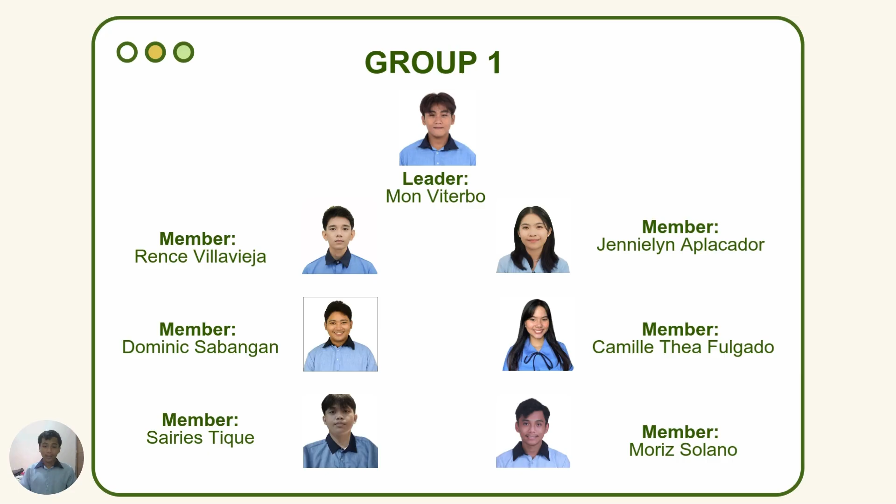So, as I said before, we are Group 1. Here are our members: our handsome leader, Mon Viterbo, and we have six other members, Rence Villavieja, Dominic Sabangan, Sairies Tique, Jennielyn Aplacador, Camille Thea Fulgado, and me, Moriz Solano. Very well then. Let's go to the next topic.

The evolution of AutoCAD. So the evolution of AutoCAD can mainly be split into four periods, let's say, from 1982 to 1992, 1999 to 2007, and then 2010 to 2017, and 2020 to 2023, and of course the present day. So let's go to the first period. The first period was, let's just call it the period of accessibility, since it was mainly focused on that.

AutoCAD was launched in 1982, specifically December 1982, as one of the first CAD, computer-aided design, programs for personal computers, revolutionizing the design process. Before its introduction, CAD tools were expensive and limited to specialized hardware, but AutoCAD advanced the field by running on widely available PCs. Before AutoCAD, if you wanted to use CAD programs, you had to use very high power and very specialized hardware, like old computers such as the IBM and the ENIAC.

But AutoCAD was the first one that was mainly available in common PCs, like the one that you are using today, except they were less updated, of course. This period also saw the introduction of AutoLISP, a programming language that automates design tasks in AutoCAD. Similar to how we designed programs in C++ in the previous semester, AutoCAD uses AutoLISP, a dialect of Lisp that is specifically for AutoCAD. AutoLISP also extended and customized AutoCAD product functionality, and by 1992, 3D designs were added, allowing for more capable projects.

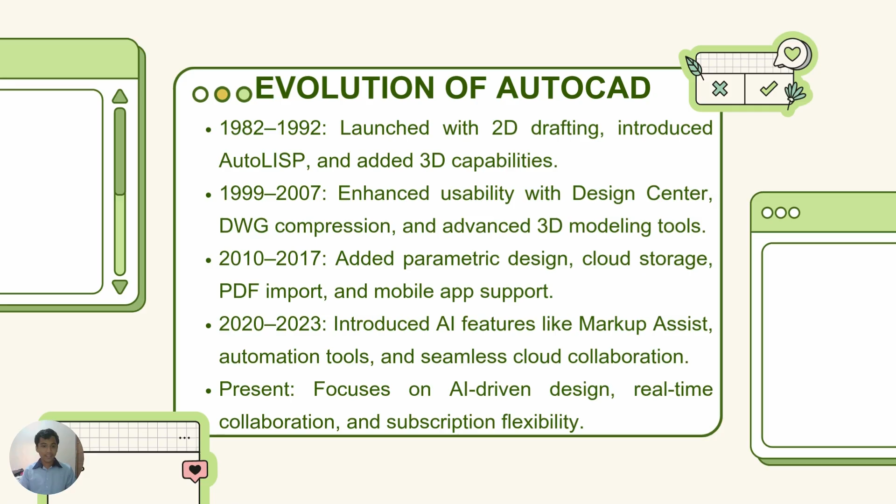Okay. Overall, AutoCAD has had many different versions, around 25 or more. And if I counted all of them, there would be even more. So I'll summarize all this just for you. I hope you enjoyed. Okay, let's move on to the next reporter on the next topic.

Impact of AutoCAD on mechanical engineering and architecture. Okay, so this is the impact of AutoCAD on mechanical engineering and architecture. For mechanical engineering, we have precision and accuracy. With AutoCAD, you can create detailed 2D or 3D models for precise component designs. Next is rapid prototyping. AutoCAD facilitates simulations and testing before production.

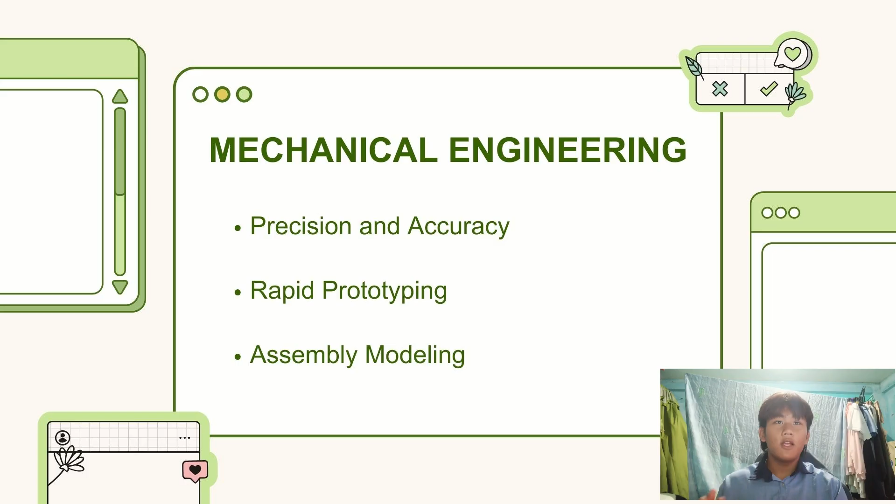And lastly, assembly modeling. AutoCAD can visualize relationships between parts in complex systems. A good example of this is that AutoCAD is used in the automotive industry to design engine components and optimize performance. While in the field of architecture, we have blueprint creation. It streamlines the creation of accurate architectural drawings. Next is 3D visualization. AutoCAD helps visualize buildings in realistic 3D for better client presentations.

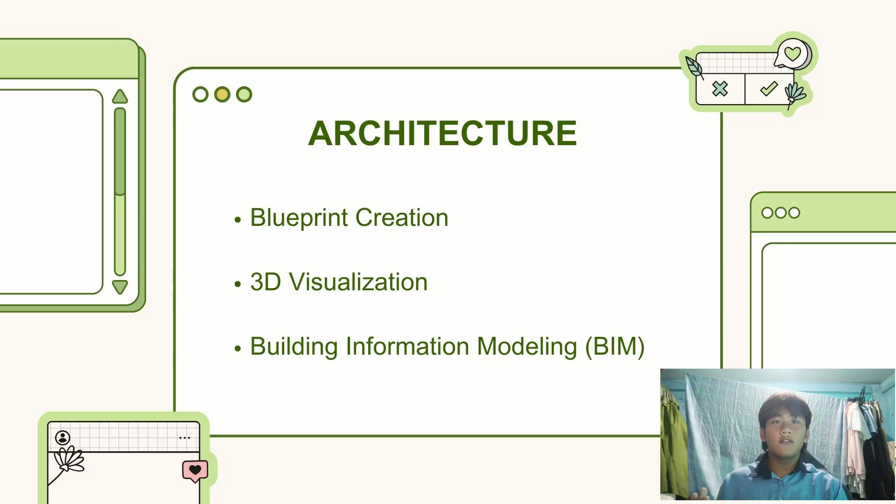Lastly, Building Information Modeling, also known as BIM. AutoCAD optimizes designs for functionality and energy efficiency. A good example of this is that architects use AutoCAD for designing floor plans and 3D building models. Next, let us proceed to AutoCAD in modern collaborative design projects. First, we have cloud integration. It enables real-time sharing and collaboration from different locations.

Next is version control. It tracks changes and ensures the team works on the latest version. Next is collaborative tools. It allows comments, markups, and feedback to streamline communication. And lastly, we have integration with other software. It facilitates seamless teamwork across different design disciplines. For example, in large-scale projects like bridges or skyscrapers, AutoCAD has various teams collaborate on structural, mechanical, and architectural aspects.

So now, let's tackle and analyze kung ano nga ba ang advantages and disadvantages of using AutoCAD in comparison to other CAD software available in the market. So let's dive in the pros of using AutoCAD. Number 1, extensive functionality and versatility for 2D and 3D design. AutoCAD is very versatile because it offers both 2D drafting and 3D modeling features. This means that whether you are creating simple floor plans or more complex 3D structures, AutoCAD has the right tools to do the job.

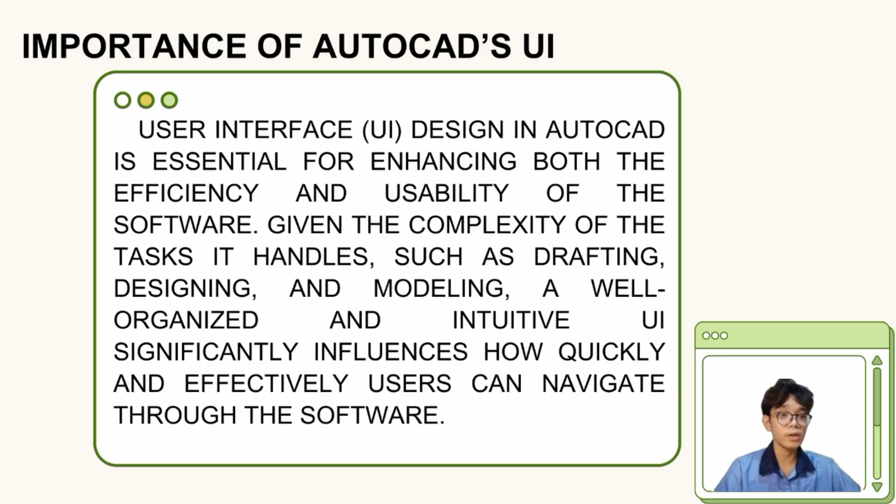So as for the evolution of AutoCAD, in the 1980s to 1990s, in its earlier versions, AutoCAD primarily relied on the command line for user input, meaning users had to type specific commands to perform tasks. This approach demanded a significant amount of memorization, as users needed to remember the exact commands and their syntax. While this method was highly efficient for experienced users who were familiar with the commands, it posed challenges for beginners as it was not user-friendly or intuitive, making the learning curve much steeper.

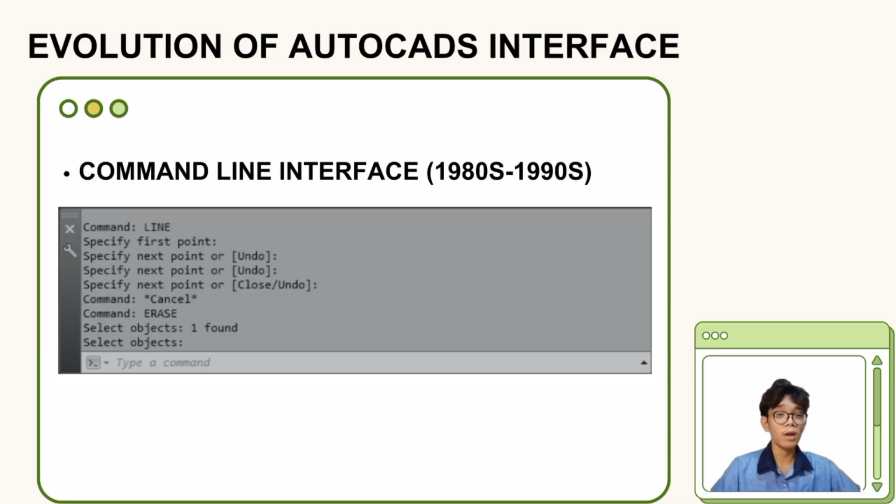So as for the example, the image is shown below. And because of that, in the 1990s, AutoCAD's user interface underwent significant improvements with the introduction of menus and toolbars. This evolution aimed to make the software more accessible and user-friendly. Instead of relying solely on typed commands like the first one, users could now perform tasks with a single click, thanks to the drop-down menu system and toolbar icons.

These visual elements were designed to be more recognizable and intuitive, reducing the need for extensive memorization. For instance, a user could quickly identify and select drawing tools, editing options, or settings directly from the menus or toolbars, streamlining the workflow and enhancing the overall user experience.

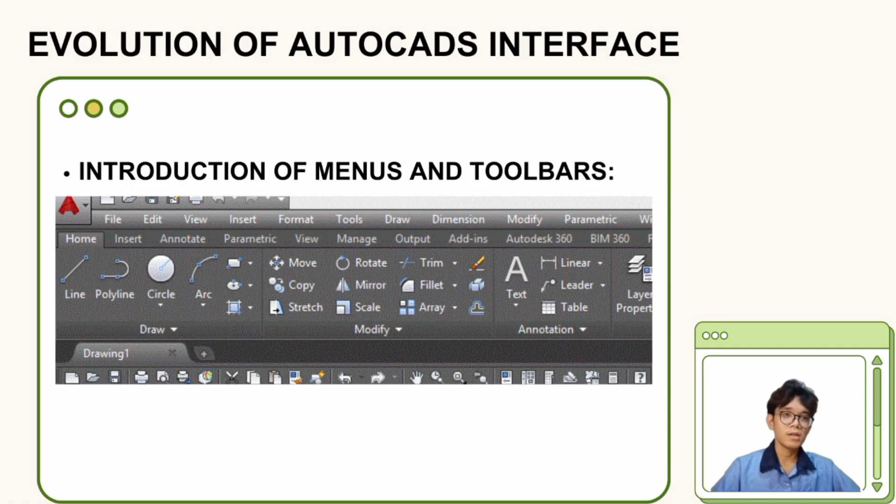In 2000, the graphical user interface was expanded, so it grew more powerful. The software adopted a more sophisticated graphical user interface, integrating more tools while enhancing visual appeal. This was part of a larger trend of software becoming more user-friendly and less reliant on text-based commands.

And in 2009, the ribbon interface was introduced. This major shift occurred with the introduction of the ribbon interface in AutoCAD in 2009. Borrowing from the Microsoft Office suite, the ribbon replaced traditional menus and toolbars with groups of related tools. This change aimed to make AutoCAD's functionality more discoverable and organized by user workflow. Though controversial at first, it ultimately became a standard for AutoCAD's interface.

Next is the 2010s era. In this, customization features were introduced: more robust customization options such as customizable workspaces and menus, where users could create specific environments suited to their projects. These features allowed for a personalized experience, giving professionals the ability to streamline their workflow.

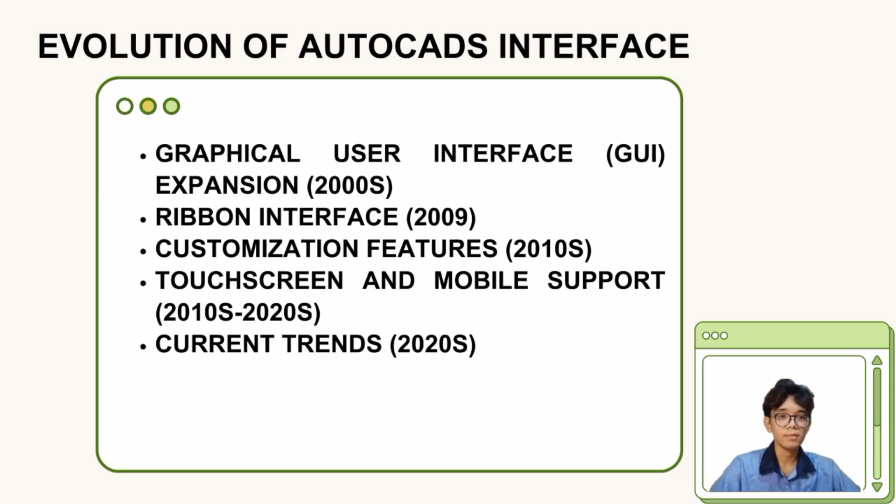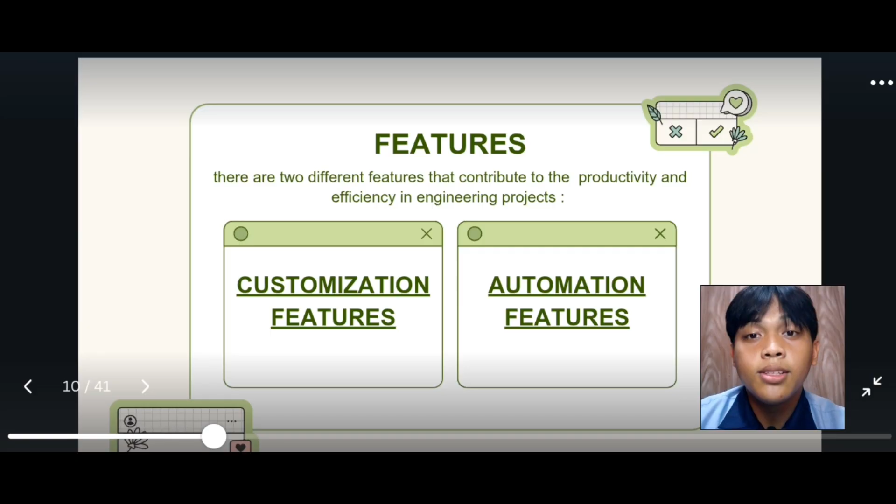How do the customization and automation features in AutoCAD contribute to productivity and efficiency in engineering projects? To answer this question, I will categorize it into two features: the customizing feature and the automation feature. In terms of the customizing feature, the first bullet talks about customizing AutoCAD drawing templates. This feature improves design efficiency by storing settings like units, scales, layers, and styles.

These templates reduce repetitive setup, which enables an easier workflow. For example, architectural templates with predefined layers for walls and furniture. This allows designers to focus only on the work, not the setup itself, as setup creates inconvenience and is time consuming. Creating templates to fulfill needs promotes consistency, reduces errors, and enhances productivity across various design fields.

In the customization features, this feature not only protects the integrity of the templates, but also encourages greater efficiency. It allows users to focus on the creative aspects of designs without repeatedly managing the basic settings. Overall, drawing templates serve as a critical component in enhancing productivity and maintaining uniformity in AutoCAD projects.

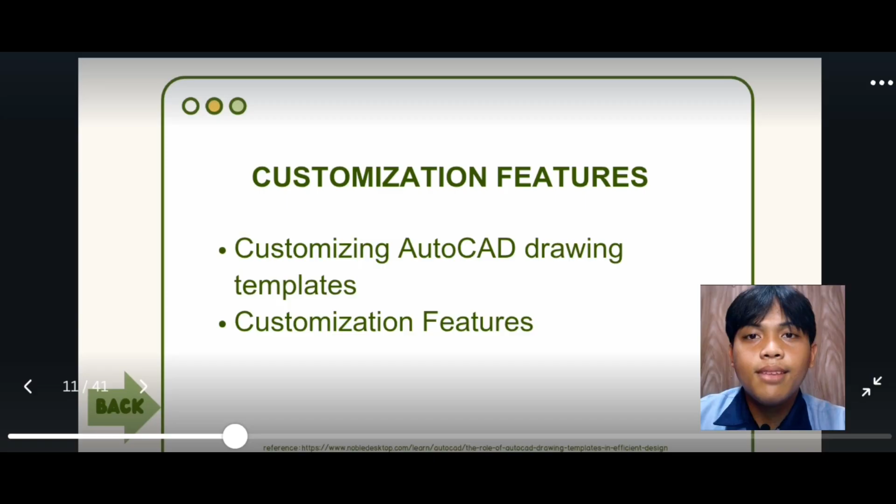In CAD design automation, this enhances efficiency by automating parts of the design process. When integrated with other software, AutoCAD allows engineers to interact with design models before any construction, improving safety, functionality, and environmental impact.

In the AEC, or Architecture, Engineering and Construction industry, automation can streamline the process, reduce cost, enhance safety, and minimize costly mistakes that can lead to delays and inconveniences for users. As these technologies advance, skilled automation engineers, architects, and designers will be essential to fully realize their potential in engineering projects.

The integration of cloud services in AutoCAD and its significance in the context of remote work and global collaboration. In terms of cloud-based CAD, this leverages the power of the internet to deliver CAD services na allow yung mga users to access and modify their designs from any device with internet connectivity. With this, it eliminates yung need for any high-end hardware. Kumbaga, it facilitates seamless collaboration and ensures accessibility and data security.

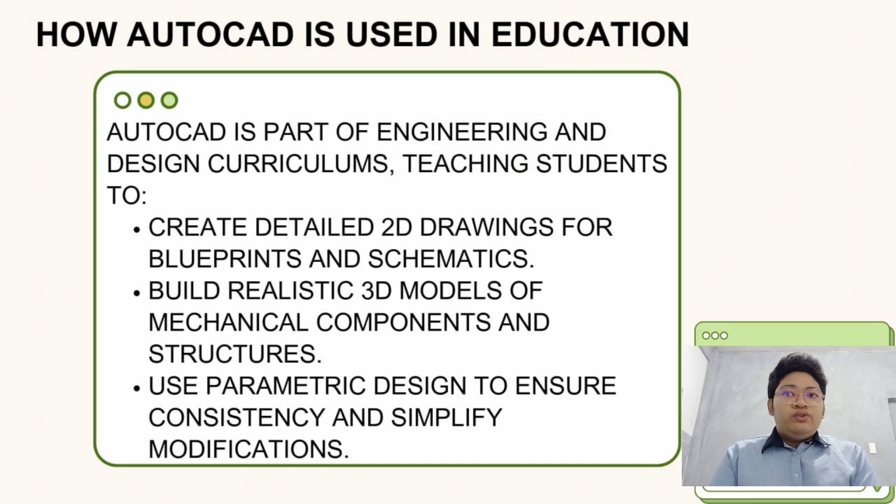before production. Lastly, the use of parametric design to ensure accuracy and consistency across designs. Parametric designs allow students to set relationships and constraints between elements of their designs. For example, if a mechanical part's dimensions change, other parts adjust automatically to maintain proper alignment. This feature not only minimizes errors but also simulates the precision required in real-world engineering and architectural tasks.

So the next topic is the key skills students learn in using AutoCAD. So basically, these are the skills developed with AutoCAD. So one of the most valuable aspects of learning AutoCAD is the development of key skills that are highly sought after in professional industries. So let's take a closer look at these skills that are about to be mentioned.

So the first skill is problem solving and creativity. AutoCAD challenges students to think critically about design problems, whether they're figuring out how to fit components within tight spaces in mechanical systems or optimizing the layout of a building. Students must develop innovative solutions. This problem solving ability is essential in engineering or design roles.

So the next one is precision and accuracy. AutoCAD's tools ensure exact measurement and alignment, which are critical in engineering and design. So, for example, in mechanical engineering, even a slight error in a part's dimension can lead to product failure. In architecture, inaccuracies can compromise structural integrity. AutoCAD helps develop a meticulous approach to their work, ensuring every detail is correct.

In terms of collaboration, AutoCAD's cloud and file sharing features teach students how to work effectively in teams. So, in real world projects, multiple professionals, namely engineers, architects, and designers, often collaborate on the same design. So, by working on shared AutoCAD files in class, students gain experience in collaborative design. So, meaning it is preparing them for team-based projects in their future careers.

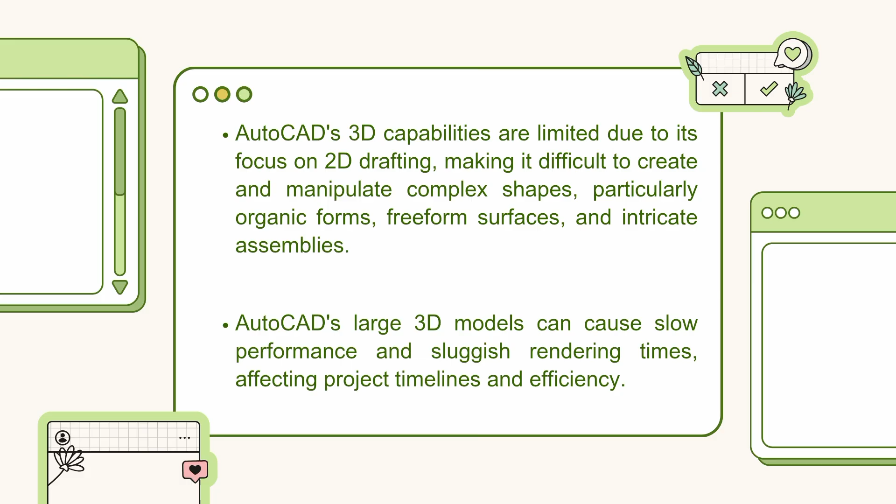AutoCAD's large 3D models can cause slow performance and sluggish rendering times, affecting project timelines and efficiency. This can result in slow panning, zooming, object manipulation delays, and extended rendering times for high-quality images or animations. These issues can hinder project timelines, workflow efficiency, productivity, and potentially cause delays.

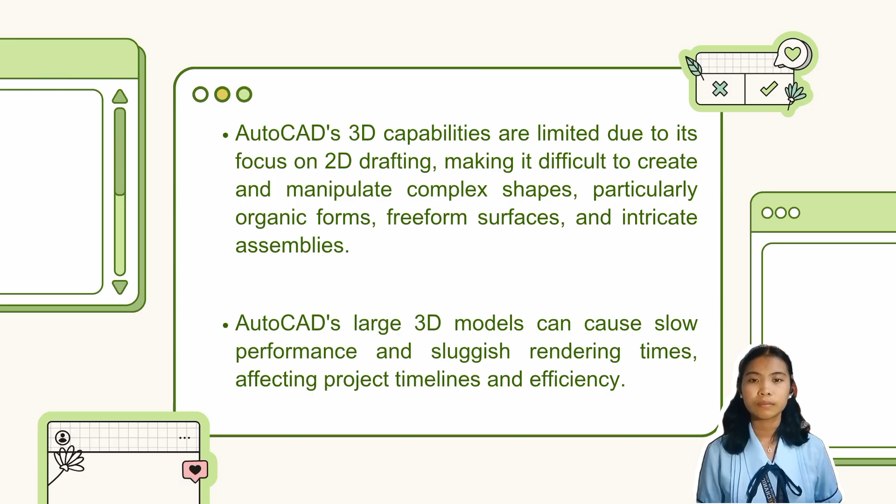AutoCAD may lack industry-specific tools and features found in dedicated 3D modeling software, which are essential for tasks like advanced simulation, product design, and architectural visualization.

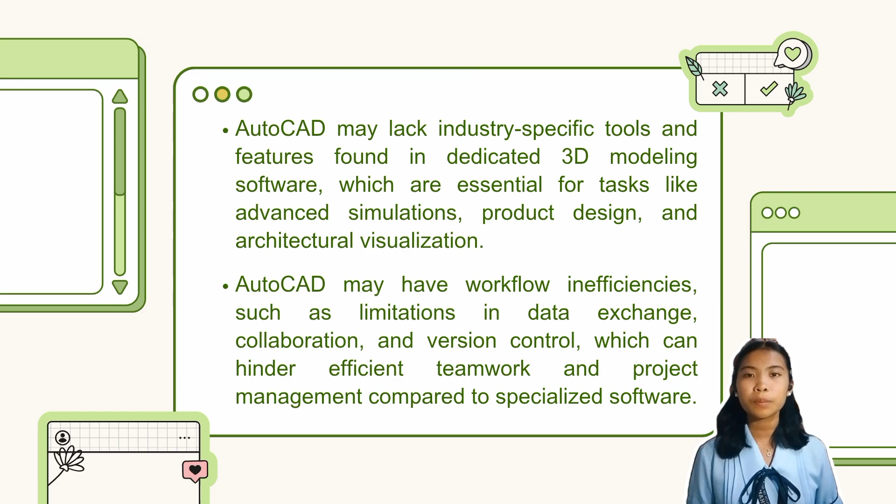AutoCAD's built-in version control features may be less sophisticated, making it difficult to manage design versions and prevent conflicts. This limitation can significantly impact project efficiency and increase the risk of errors and delays, particularly in collaborative projects involving multiple teams, members, and software applications.

Good day everyone. Today I will discuss an exciting topic: the future of AutoCAD with the integration of AI-powered tools and features. As technology advances, AutoCAD is transforming into smarter, more intuitive software, paving the way for the next generation of design and engineering. Come and join me and explore how AI, machine learning, augmented reality, and other innovations will reshape the future of this essential tool.

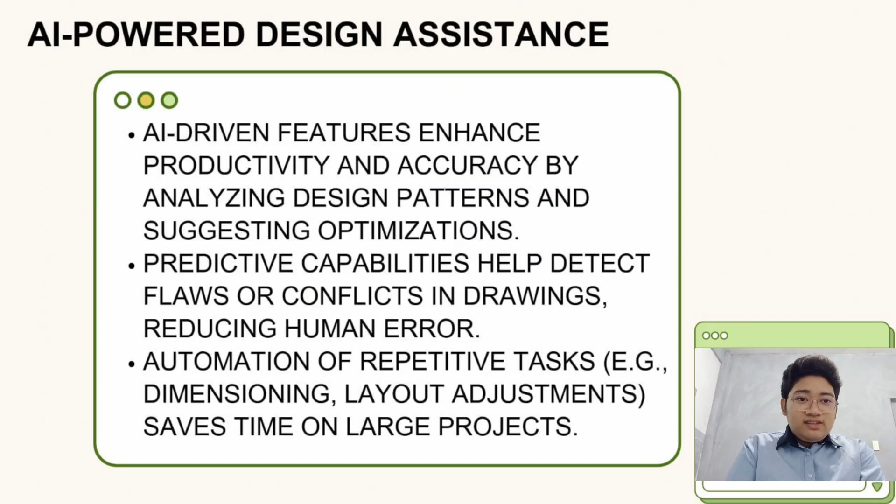AutoCAD is already incorporating artificial intelligence to make workflows faster and more accurate. For example, AI-driven features can analyze design patterns, suggest optimizations, and even detect potential flaws or conflicts in drawings. This means engineers can focus more on creative and strategic work rather than spending hours revising or searching for errors. AI can also automate repetitive tasks such as dimensioning and layout adjustments, saving time especially on large-scale projects. Imagine how much faster and more precise projects will be in the future with these tools. AI isn't replacing engineers, it's enhancing their capabilities.

Now let's talk about enhanced visualization through AR and VR. Another major development is the integration of augmented reality and virtual reality. These technologies will transform how we interact with designs. For instance, architects will be able to walk through virtual versions of buildings to evaluate layouts and spatial relationships. Mechanical engineers can interact with virtual prototypes to test functionality before production even begins. This immersive approach will allow designers to identify potential issues early and refine their ideas in ways that weren't possible before. Can you imagine being able to explore your design as if it already exists?

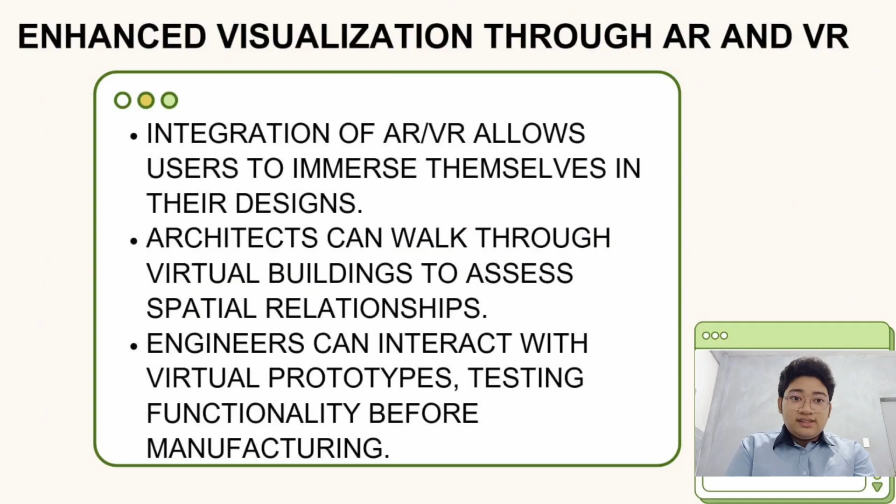Concerning cloud computing and IoT integration, cloud computing and the Internet of Things are becoming central to the future of AutoCAD. With cloud computing, collaboration and data management will continue to improve. Team members will work seamlessly on projects in real time, no matter where they are in the world. IoT will take it a step further. Imagine using real-time sensor data from a machine to inform your design decisions in AutoCAD. Engineers could optimize designs based on how a machine performs in the real world, making projects more efficient and innovative. This means smarter designs, more informed decisions, and better outcomes for everyone involved.

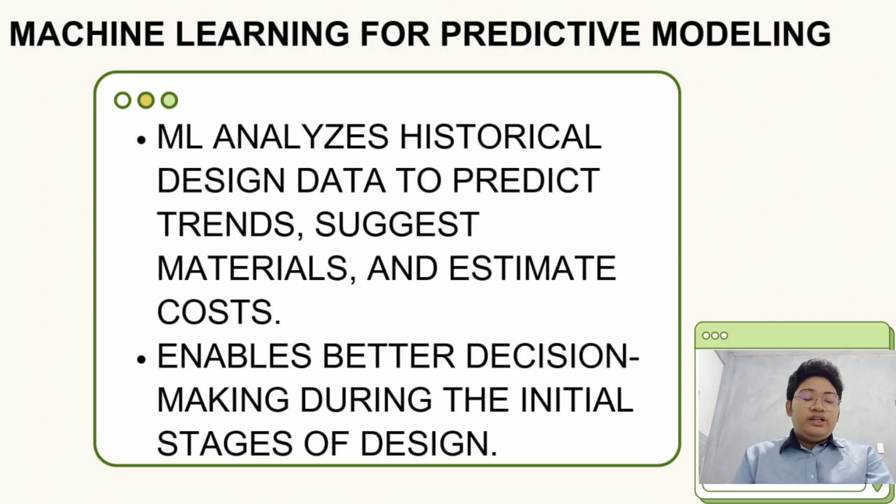On the topic of machine learning for predictive modeling, machine learning is another technology shaping AutoCAD's future. By analyzing historical design data, machine learning can help users predict trends, suggest materials, and estimate costs. For example, if you're designing a mechanical part, machine learning algorithms could recommend the most efficient materials or predict potential wear and tear over time. This will allow engineers and designers to make informed decisions early in the process, saving time and resources.

Automation and customization at new levels. Future versions of AutoCAD will also bring advanced automation and customization. Users will be able to develop custom workflows tailored to their industries. For example, a mechanical engineer might automate the creation of specific parts or assemblies, while an architect could customize workflows to streamline their building designs. This level of adaptability will make AutoCAD even more powerful, enabling professionals to work more efficiently than ever before.

Sustainability and eco-friendly design. With growing concerns about sustainability, specifically in terms of climate change which are now obviously seen in our current environment, AutoCAD is also likely to support eco-friendly engineering practices. AI-powered tools could help designers assess environmental impacts, energy efficiency, and life cycle costs of their projects. For instance, engineers could simulate and analyze how materials impact carbon emissions or energy usage, enabling them to create sustainable and eco-friendly designs. This aligns perfectly with the global push for more sustainable development.

In conclusion, the integration of AI and advanced technologies in AutoCAD is revolutionizing design and engineering. With AI-powered design assistance, immersive AR and VR tools, real-time collaboration through cloud and IoT, predictive modeling, enhanced automation, and a focus on sustainability, AutoCAD is not just keeping up with the future, it's defining it. These advancements will make workflows smarter, faster, and more innovative, ensuring AutoCAD remains a cutting-edge tool for years to come. The future of design and engineering is bright, and AutoCAD is at the forefront of this transformation.